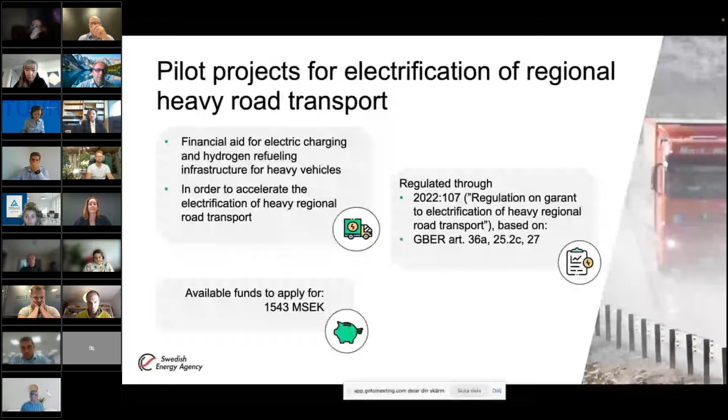You can change slide now, Gunnar. At the end, during the summer or late summer, finally we have financed roughly 140 electric charging stations for heavy vehicles, and you can see in blue dots all the electric charging stations financed through this scheme.

On the right picture, you can see the slide. You can also see hydrogen stations financed, and one nearby Uppsala in the middle of Sweden, which is combined - both electric charging infrastructure and hydrogen infrastructure.

The interesting part is this is a lot of recharging infrastructure, and quite a lot of hydrogen also compared to the situation today - basically we have none for heavy vehicles at all in Sweden. All of these have to be erected and in use roughly one year from now, so hopefully this will go very fast.

You can change slide now, Gunnar. But I will also add that this is not the only public recharging infrastructure program we have. We also have programs for non-public recharging, and a general program for recharging infrastructure in Sweden, called Klimatklivet, or the Climate Step.

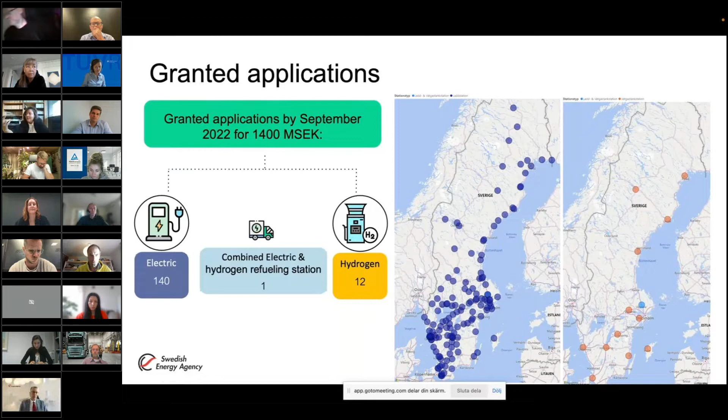We had all sorts of requirements to pass this. I didn't go into these details, but you had to have 350 kilowatt charging points, and you could load balance such that you had 175 kilowatts in pairs by two. And most of these recharging points are more than two or more than four recharging points at the same station. I don't have the exact numbers here now, but most of them are several recharging points at each station.

Also, all sorts of other types of requirements for maintenance, for 5 years usage, for connections to infotainment systems, etc.

Thank you. Another question that was in the chat, and also solved there, was how much is 1,400 million SEK. If you divide it by 10, you get the amount in euros, more or less. So it's a pretty big incentive scheme, and 140 stations are quite a lot too.

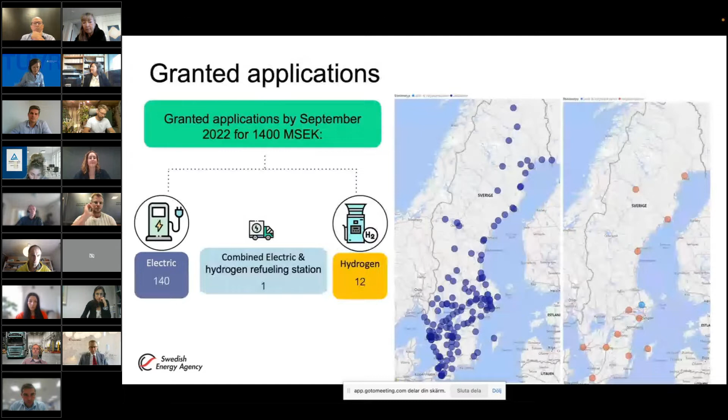All right, so any more questions in the chat?

Anders Berg from Volvo: may I add as background, FFI was initiated back in 2008 as a response to the financial crisis, to help the competitiveness of the Swedish automotive industry. The funding is set up as a 50-50% scheme, where public funding from taxpayers is 50%, and it's expected to be met by at least, and actually more than 50%, in-kind contribution from industry. So it's good to understand that in practical terms, it's more than 50 — it's 60-40 or something like that. Perhaps you have the exact figures, Frida? I don't have the exact figures, but it's somewhere around there, yes — 60% industry funding and 40% state funding in this program. It's been running since 2008 and is the backbone of Swedish research and innovation in the automotive sector.

Okay, I think we need to move on — there may be time for questions at the end of the workshop. We will also provide you with contact details, and you will get the presentation, so there will be possibilities to get back and clarify things.

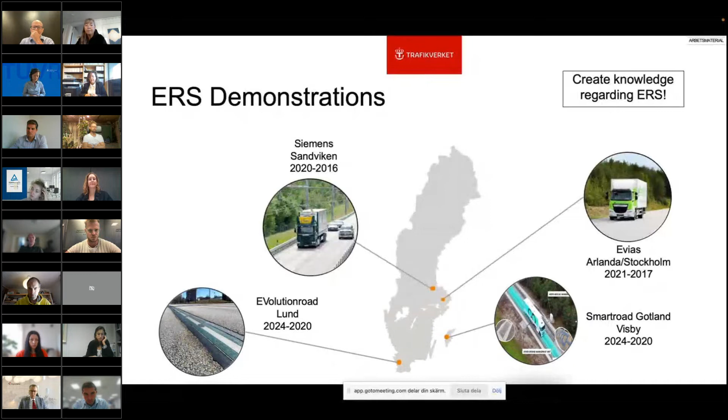You can change the slide. The government has also tasked the Swedish Transport Administration with constructing an electric road pilot as the first permanent electric road in Sweden. The pilot will be on a 21-kilometer long section on the E20, south of Örebro — maybe not in the middle of Sweden, but in the middle of this map.

And the procurement is planned to start during the second half of 2022 and include the selection of ERS technology for this pilot. This electric road is anticipated to open for traffic late 2025, but of course there is a lot of uncertainty about this, but our aim is still to have it open in 3 or 4 years.

In parallel with the assignment to construct the ERS pilot, the government has also tasked us to develop a plan for possible rollout of an ERS network based on what we have shown in previous plans, shown on the map. On this network, we should identify suitable sections, and these should be presented to the government in December 2024 at the latest.

So that is still a year, almost 2 years, probably. Beside these national ERS activities, Sweden also has cooperation, especially with Germany, but also with France on ERS. There's quite a lot of common research projects which we have done, and we also have results from.

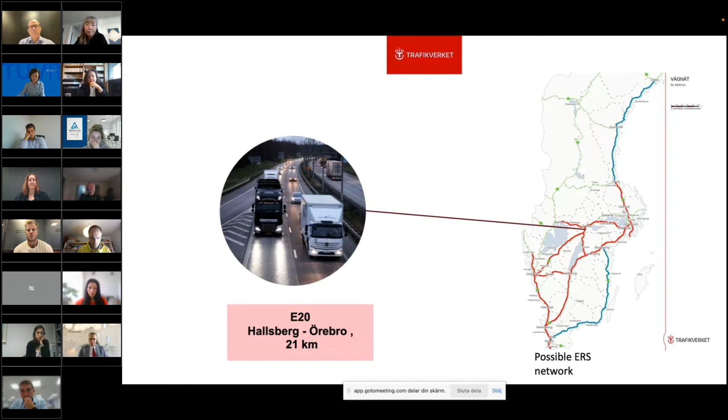I think that was everything, so thanks for me. And I hope it was understandable.

Yes, absolutely. And thank you very much, Thomas. It will be interesting to follow this and see what happens, especially since they haven't chosen the technology yet for the section that will be built till 2025.

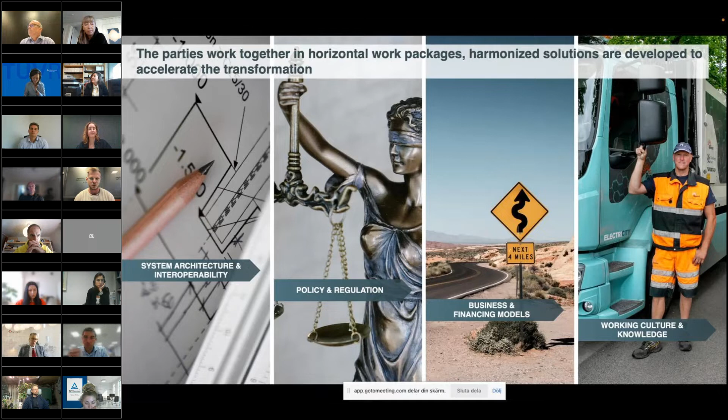I can just show you one more example, a little more in detail. You can skip to the next slide where we have the economic example.

Here is one example of what we are doing in the business and financing models part, doing those economic analyses based on data from the logistic actors, doing comparison studies between the electric systems and the diesel systems.

So here you see real figures from one of our operators that operates 2 electric trucks, 27-ton trucks, that run approximately 350 days a year, 2 shifts, reaching approximately 75,000 kilometers per truck per year.

Here you can see that they have installed a high power charger, being able to charge the truck during the reloading and unloading processes at the terminal. They also have low power chargers installed at the terminals that are used during the night when the vehicles are not in operation.

For this case, they use a 6-year depreciation time because they have a 6-year contract with the customers, so it's a quite long contract period, which is also an enabler for putting those trucks in operation, because as you can see, there is quite a big price difference between the electric truck and the diesel truck.

But thanks to those longer contracts with the transport buyers, it makes it really possible for them to put those trucks in operation. What can also be mentioned here is in Sweden we have those incentive schemes that Anders was talking about. For the trucks, it's 20% of the total cost of the truck that has been co-funded. And for the charging infrastructure, the non-public charging infrastructure that they have installed, it's 40% of the total cost. That is the maximum that this kind of party can get hold of.

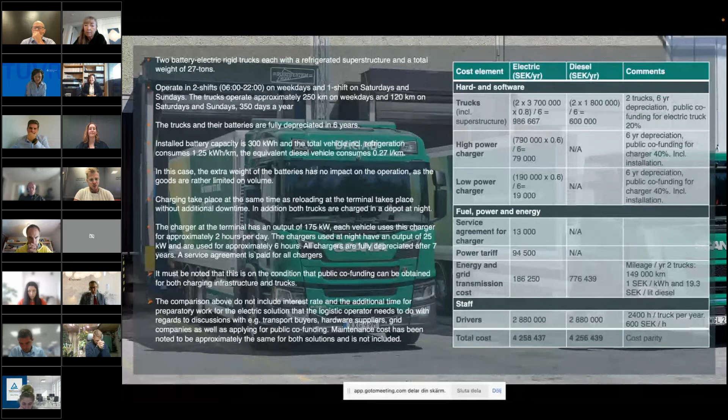But it must be noted that this is only possible due to the long contract periods and also thanks to the public co-funding that can be obtained. Otherwise, of course, the electric trucks would not have been as competitive as they are in this comparison.

What can also be mentioned is that we have not included in this graph the extra time that the operator needs to put down before the operation starts, because there is a lot of planning time that adds up in the operation that we have not included. It has been seen to be approximately 250 to 300 hours to put the first vehicle and charging infrastructure in place. So it's an effort for the logistic operators.

And we have also not included the maintenance cost as well as the interest costs. The maintenance cost has not been included because we have seen in the cases so far that it has been quite similar, so we would like to get more data on that before we put it in the calculations. But we have more of those simulations.

You can jump to the next slide, Gunnar. In a report that we will soon release from the project, we will publish it on our website and also through our LinkedIn channel, where we will present some more of those business case figures as well as more details on the different demonstrators that we operate. So I will gladly share this with you, Fernando. Maybe you can share it in the ALICE network afterwards as well. But it will take some weeks before it is finally published.

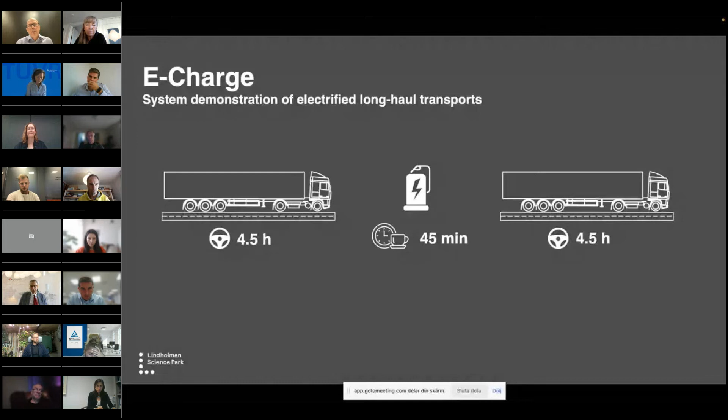That's the target with this project. But as Andreas mentioned, there are many other aspects we'd like to cover. If we can manage to run vehicles like this, we can operate a vehicle one day in Sweden, the next day in Germany, and the third day maybe down in Italy. That's something very common on the TEN-T network.

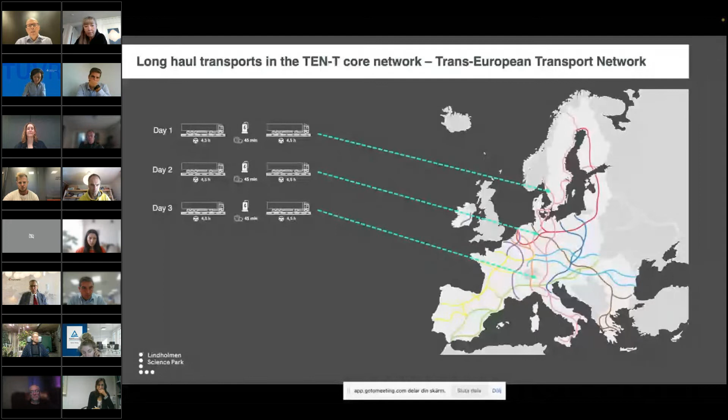The project is like in real life - we have competitors working in the same project. We have both Scania and Volvo developing these long-haul battery electric trucks, and we have ABB developing the megawatt charger systems that will be used in the projects.

We have two different, what we call them, petrol - energy supply companies along the highway, Circle K and OKQ8, and they will operate these MCS chargers. So they are also competitors working in the same project.

Then we have three different logistics operators: DB Schenker, ICA, and Tommy Nordberg. DB Schenker will move styckegods - pallets and parcels, you can say. ICA will move refrigerated goods, food, and Tommy Nordberg also food and stuff like that.

We have the Swedish electromobility centre conducting academic research in the project, from four different universities in Sweden. And last we have Vattenfall, the Swedish energy company - they are both grid owners in some parts and selling energy, so they are part of the project.

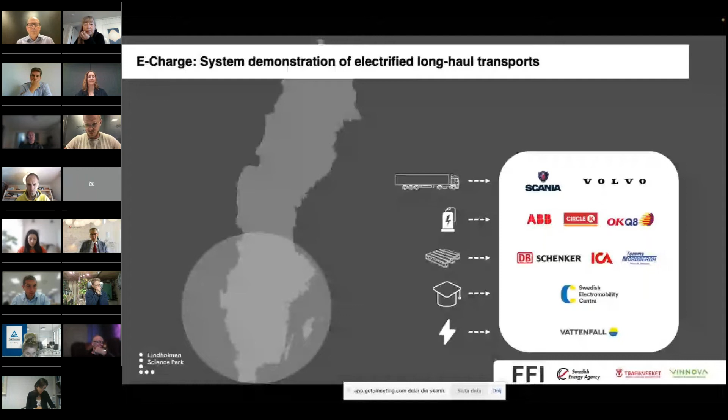When it comes to the research areas, we will look at several different areas - from the vehicle, modeling how the vehicle's energy consumption depends on the road, the weather, the speed, wind, and so on. On the cargo side, we will look at the logistics system and how that will be affected by this new technology.

We will look at the charging system in a simulation model that could handle thousands of objects, and there we will look at the number and location of chargers. Input of reliable data is very crucial for that part, of course.

We will look into the system cost efficiency, and into the grid and effects on the grid - both in terms of capacity but also in terms of quality when it comes to these high power chargers. How will they affect the quality of the power grid? And last but not least, we'll look into policy and regulation.

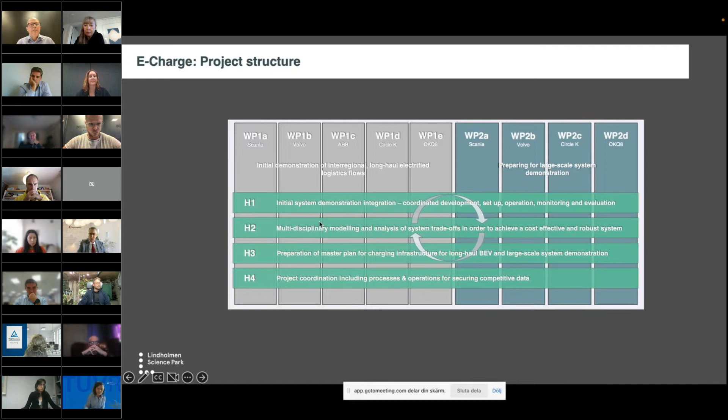The next step in this project - I just want to say one more thing: we do not display yet what kind of flows or where these flows will go in Sweden, but they will be operated during a 12-month period, and the project will end. The planned end of the project is December 2024. So we will run these flows for 12 months to get as much data and experience as possible from all kinds of weather conditions.

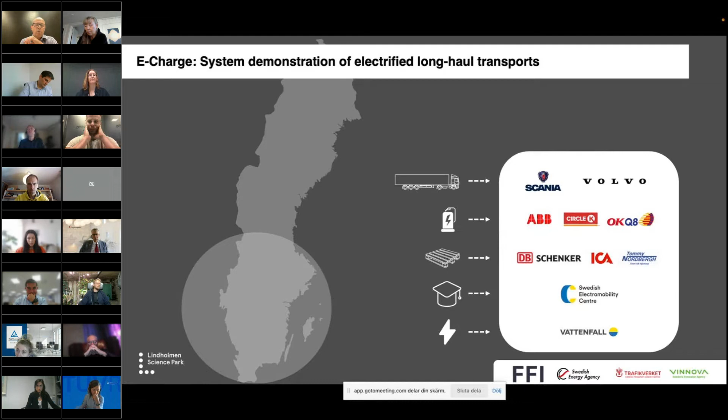One important step is, of course - we're not just there to run these first two to four vehicles in the project. We will also prepare for what should we do in the next step: how should the necessary charging infrastructure look like if we would run a lot of battery electric vehicles like this in Sweden? That's a big part of the project - in order to understand how we should scale up the system.

And that is also the topic of the panel discussion - not just scaling up the long haul transport, but what are the barriers for scaling up?

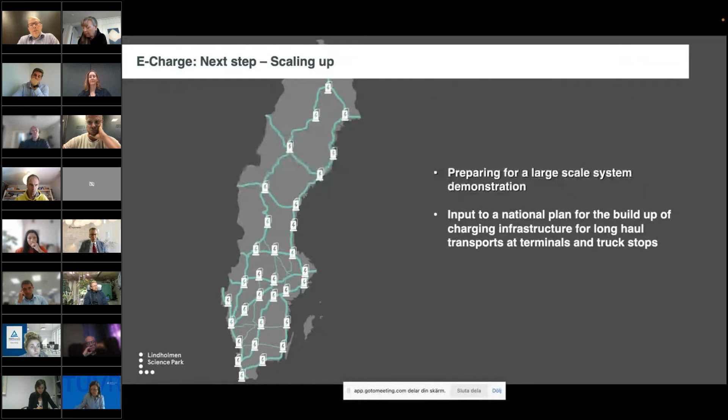So if we are looking again at a roadmap of the project we are working on, we are in this initial system demo eCharge, and Andreas and his colleagues are running the REEL project here. But what is the next step? How do we scale up the system, both for the kind of vehicles that we test in eCharge and the vehicles tested in REEL?

As you may have heard from Frida, when it comes to the FFI, they want to see these big system demonstration projects where you take care of all these different aspects like policies and regulations, business models, norms, attitudes, habits and behavior, and also the infrastructure that is needed, the digital infrastructure as well as the electric and road infrastructure.

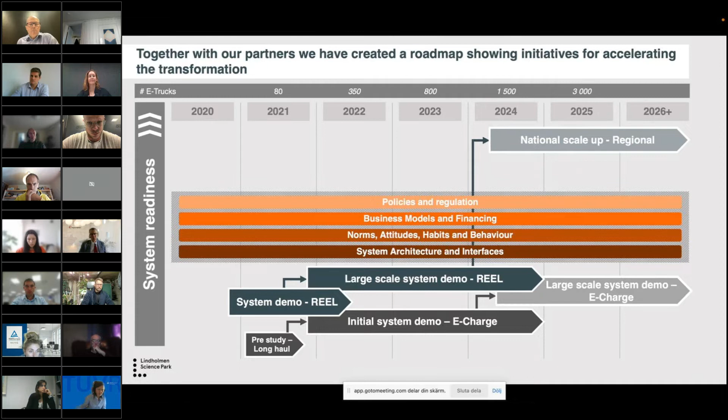Some of these topics we will address in the project, some are addressed in REEL, and during this time when we work with REEL and eCharge in parallel, the market will evolve. So what will the scale up look like in the next step? That was really the last slide I had before this, and you can read some of the project eCharge here at Lindholmen.

We will probably in the future also present more on LinkedIn from the project itself. And if you have any specific questions, you're welcome to email me. But with that, I would like to continue in the program, having given you a glimpse of the eCharge project.